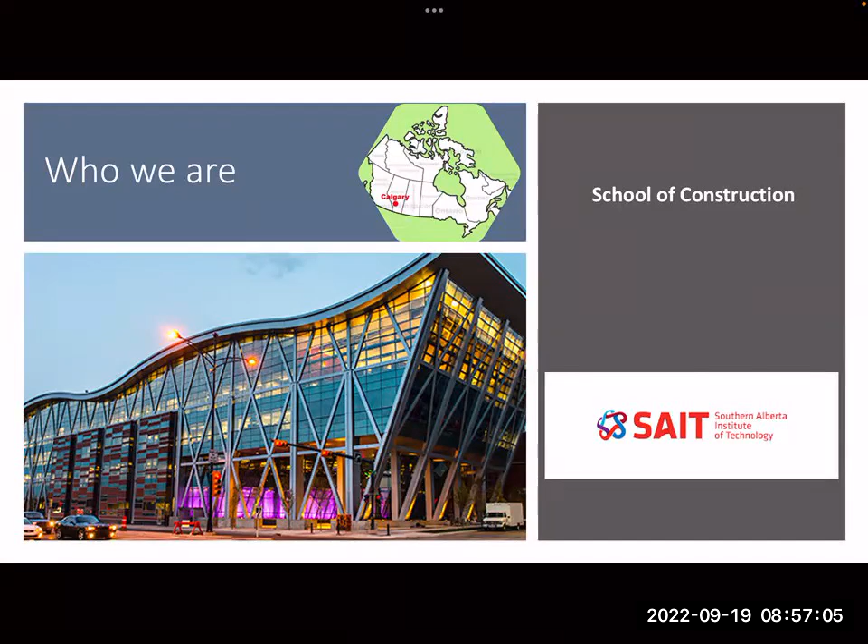Again, my name is Azzeddine Oudjehane, and my involvement has been in sustainability for the past 20 or so years. I've been involved with board director advisory for the Canadian Green Building Council in the Alberta chapter, and work with government, with industry, around the same objectives of bringing sustainability to construction and in general to our life. I'm passionate about that, and being involved in research and development as well as curriculum and partnership.

I'd like to acknowledge part of this, and I'm currently in Switzerland after visiting some of our partners in Europe. Again, same goals and objectives globally around sustainability, using different alternatives like what you've heard. I believe an approach to mass timber, global towards climate change, by Patrick Kraft from Bird Construction. This is kind of the same path.

I'll emphasize at the end one proposal, or one suggestion, or a proposition on how to bring the built environment towards that. But before that, we'll tackle some of the key questions. Why are we here? And what are the trends? What are we doing to face the challenges? Because we are here primarily because we have a carbon emissions challenge.

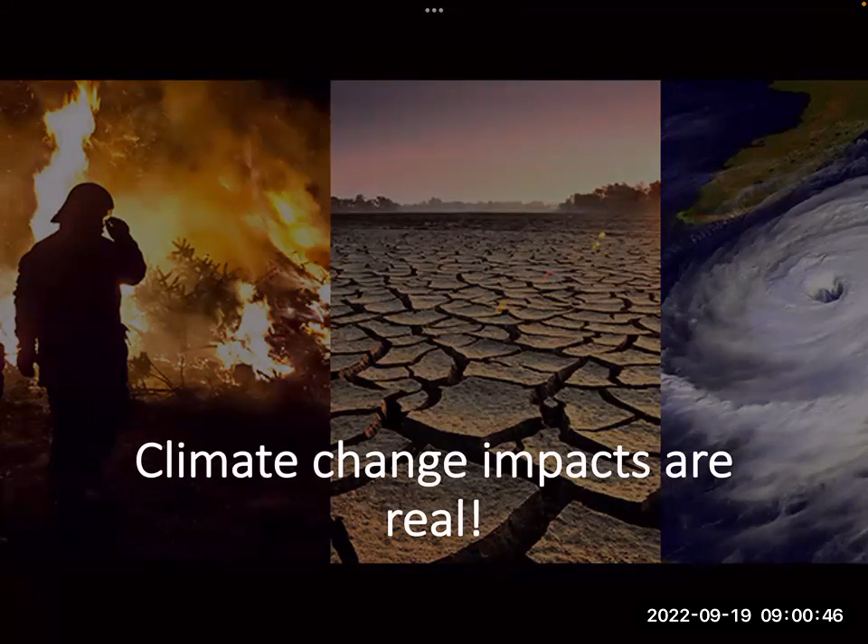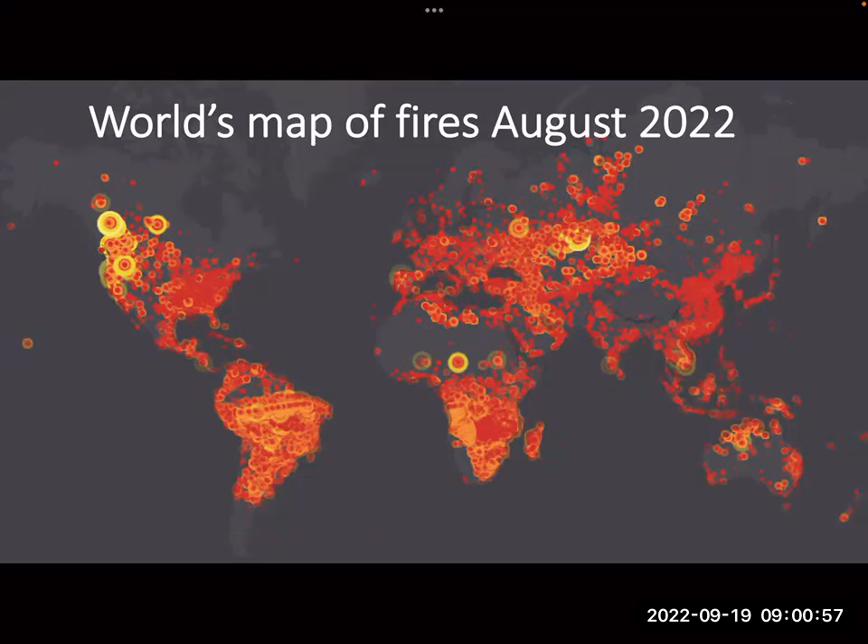This is an image, a satellite picture from a Canadian site showing the fires as of August 2022, about a few weeks ago, I guess. Same picture, using a NASA satellite image, and you can see the hotspots, the red hotspots for fires across the globe. Well, luckily the desert is yellow, but there's no vegetation there to go on fire.

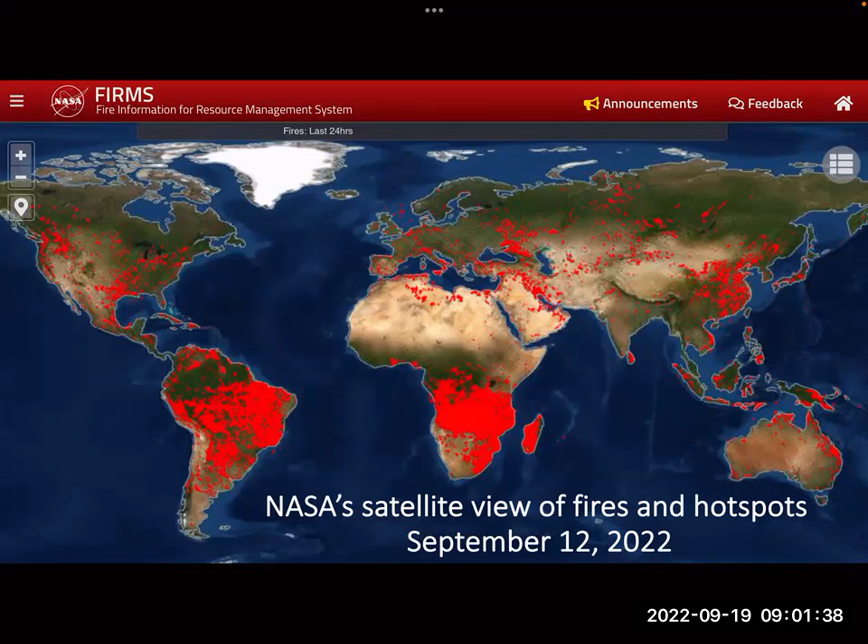What I find interesting is the fires in the southern hemisphere, where it's not even summertime. So we have a lot of hotspots now in the western side of North America, California in particular, and some even in Western Canada and British Columbia a few weeks ago, that have had an impact.

How can we accelerate decarbonization? Worldwide—not just in Canada, Europe, or North America—globally.

It has to be a common objective that we pursue to stay below the 2 degrees Celsius increase of temperature, and hopefully achieve 2050 neutrality, if not negative. How do we do that? We know the ways. We need to reduce the use of fossil fuel, and we need to do business differently.

The challenge is getting to 30% reduction of carbon by 2030, and carbon neutral by 2050. We've been talking about it for years, for decades, and every time we keep pushing the goal. So let's dive into why we talk about the built environment.

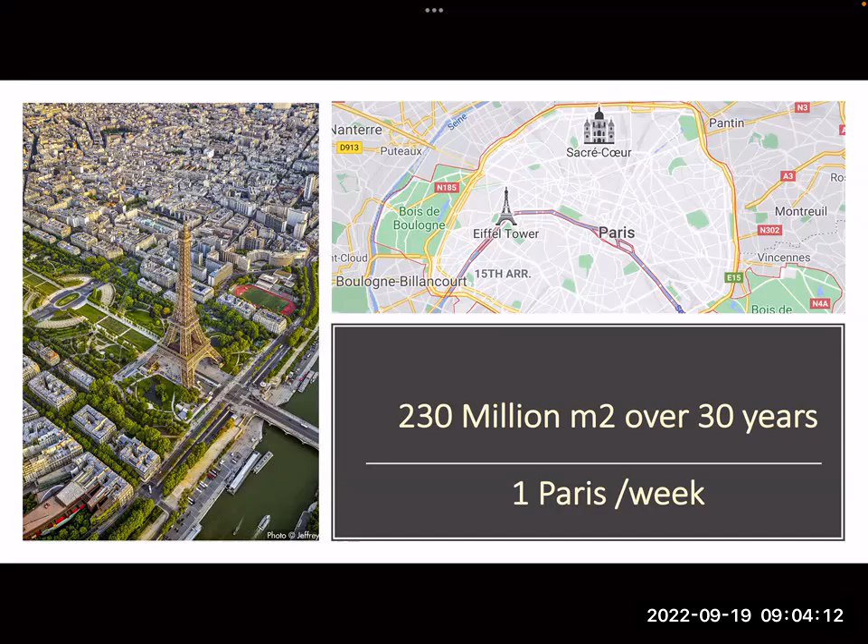That's why we need to be conscientious. And why the built environment? Overall, 39% of global greenhouse gases result from the built environment - 28% from operation and maintenance, in other words heating, cooling, lighting.

The other 11% is embodied carbon, which comes from the material, from cradle to gate - from extraction of materials, processing of materials, to delivery of the project including construction. So that's 11%. Any percentage of carbon we take off is a valuable input.

Going to carbon footprint - in my educator role, I always like to bring everybody to the same level. So what I'm talking about in terms of carbon footprint is what individually we do on a daily basis: going to work, buying groceries, traveling, and so on. It's typically measured in tons of carbon equivalent, metric tons.

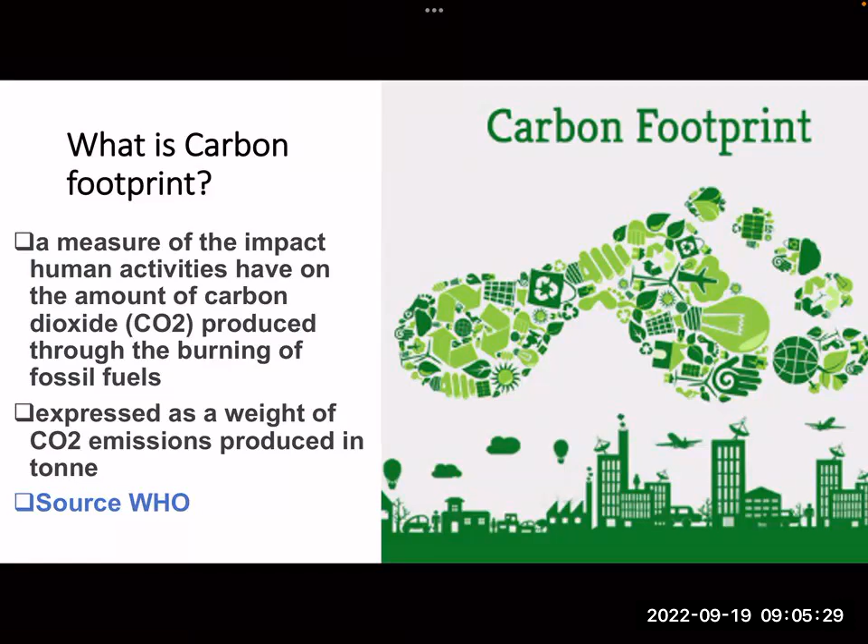That's where we have an individual role. We all have a carbon footprint - you can see the image here. How can we reduce that? My travel to Europe this time is equivalent to 3 tons of CO2 equivalent.

That's a lot. So I am aware of it and try to remain cognizant of my impact, because 3 tons of CO2 equivalent is more than the carbon footprint our household has - approximately 2.5 tons for heating and cooling over a full year. So that's less than my footprint just from traveling to Europe this time.

By being conscientious of the carbon footprint I have when I travel, I have to find alternatives. That's our common goal - how can we all achieve that? Continue our practices, continue to travel or do other activities while reducing our carbon footprint, or at least maintaining it at a level that's not going to affect the planet.

As a proponent of training, this is how I see the first step, or the first barrier: creating awareness. We need to train students, our communities, bring awareness about carbon footprint. Individually, if we all walk the walk, we'll get to net zero. So that's my first path to net zero - giving awareness or creating awareness about carbon footprint and how to reduce it, or finding alternatives.

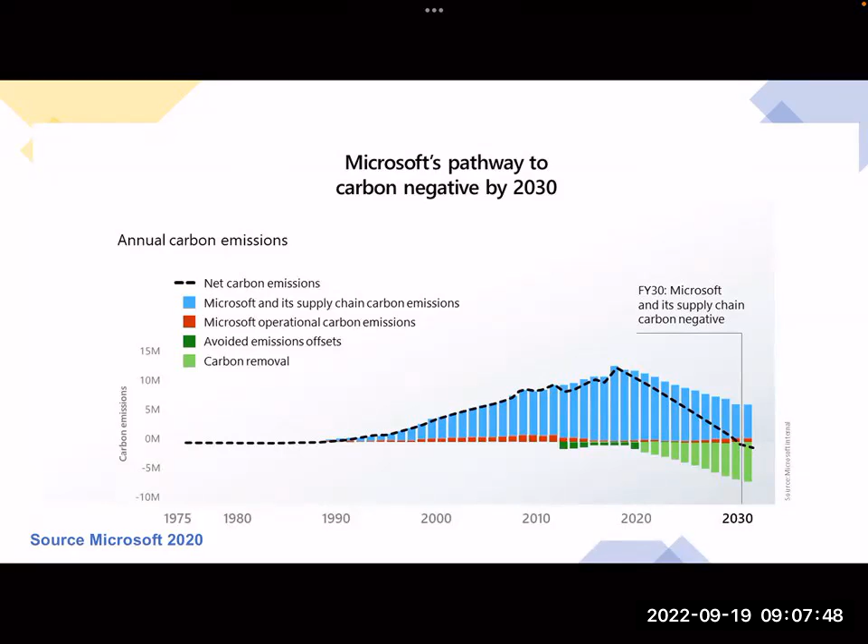So what are the trends? Globally, I'll use some examples of large corporations. Microsoft is hoping to achieve net carbon negative by 2030, and by 2050 offsetting all the emissions put into the atmosphere since the mid-70s. How do they do that? By going renewable, building better, having buildings that are healthy, with no carbon emissions during construction and no carbon emissions during operation.

That's a goal. Google made a statement years ago that they have actually been carbon neutral for the past 10 years. How did they achieve that? By using renewable resources, no fossil fuels. So as long as they maintain activities below a certain level, they can achieve that. Our buildings need to be healthy.

Walmart - and you can see I used a spectrum of businesses from different sectors - Walmart goods and services committed to 2040. The reason I'm using Walmart is they have a path, and it's tied into how they're driving the business, tied to construction and using and building better.

Amazon committed to buying 100,000 vehicles. They're not changing the core of their business. Amazon delivery, they're committing to one day or same day delivery, but they want to reduce the carbon footprint. And then again, it's your conscience about, do you buy from Amazon when they have a delivery? So if you are part of that spectrum, do you go to the store? Do you walk to the store? Do you drive to the store? Do you order Amazon? And those are personal choices, but they are part of our carbon footprint.

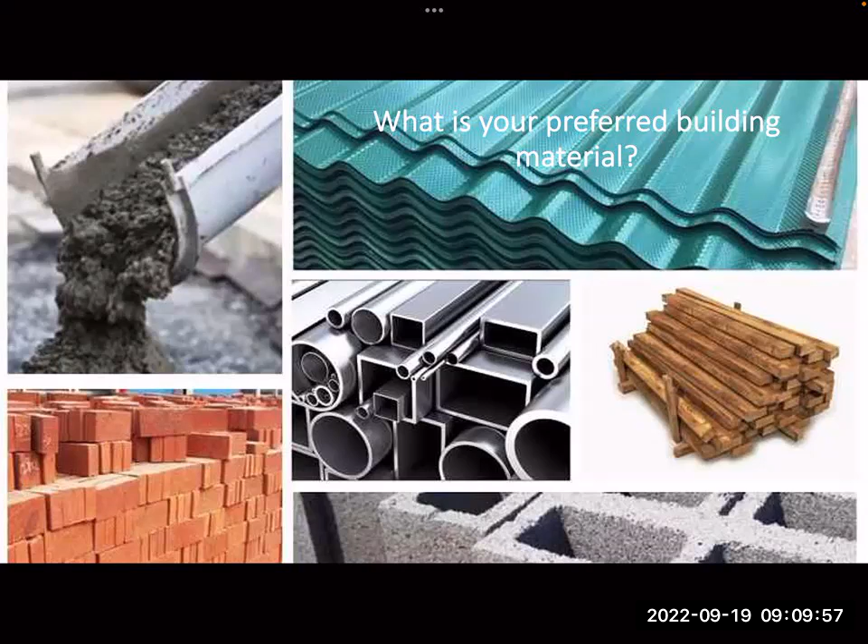So can the built environment achieve net zero and carbon zero to some extent? That brings me to my second poll question. I want you to reflect and give me your opinion on your favorite or preferred building material, construction material, based on your country of operation and your personal preference. So what is your preferred building material? And I'm only giving you three options: concrete, steel, or wood. Three main general building materials, depending on where you are. If you have a preference for brick or masonry, related to concrete, that's close enough. Okay, how are we going to do that?

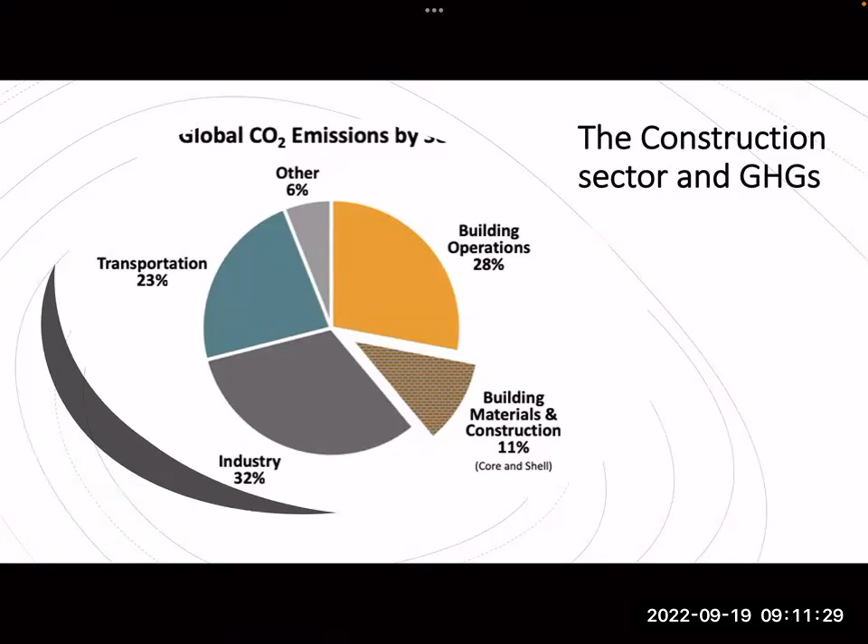I know European legislations now are putting stringent standards that in a year or two - I know talking with colleagues in France as well as in Denmark, what they are building now to current standards, they won't be able to build in 2 or 3 years with new standards of carbon neutrality.

If you have chosen concrete as part of your preferred material, you're aware that concrete uses sand, and by 2030 or so, there'll be a shortage of sand to use in concrete manufacturing. Because sand is actually the third natural resource extracted out of the planet after air and water. Well, that's a fact. So bearing in mind that, the other stat or fact that I want to relate came from a report from the UN in 2017 and 2018.

The concrete industry produces or emits 8% of the overall GHGs globally. Compare that to the airline industry - stats from the airline industry, I went to check, these were about 2.5% as of 2020. Granted, it was post-COVID, so with little airline activity, but overall, the airline industry emits about 2.5%, all sectors included. Shipment industry, 5%. So these are interesting numbers. And all these sectors are working towards the path.

Talk to innovators. I'm not involved in the airline industry, but I've heard or read a few days ago that Air Canada, one of our largest carriers in Canada, has agreed to purchase 10 or 20 hybrid aircraft, using electrical power and probably biofuels, but that's the commitment. Again, we don't want to disrupt the businesses. We just want to find alternatives of doing business cleaner, in a better way.

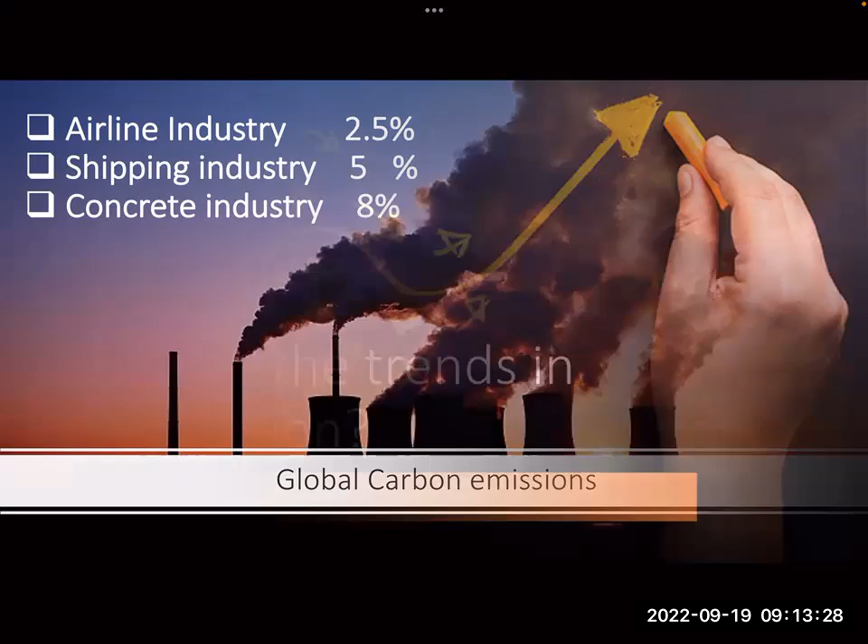And that's what we want for the construction industry. Slow steps, but the trends are there. You heard from Bird Construction. In this presentation, I'm using another example, Chandos, with a net zero by 2040 commitment. The construction sector, when you have leaders like Bird, like Chandos, they also drive their suppliers, their subtrades. I know for Chandos that they committed to net zero by 2040. They will no longer contract or purchase materials from suppliers who, for example, are not committed or don't give their full carbon transparent data.

And so that's, again, leadership and big drivers that will bring us to changing the way we do business on a daily basis. Walmart - I use specifically Walmart, though others could serve similarly - has recently committed to building a large campus in southern United States, the campus for headquarters and training. It's committed to being carbon neutral, using different ways of building, like mass timber construction. And so that's the trend we see, building better as we maintain our core businesses. And so, you heard it from Patrick, I'll continue the trend. Wood is trending because it's a green material.

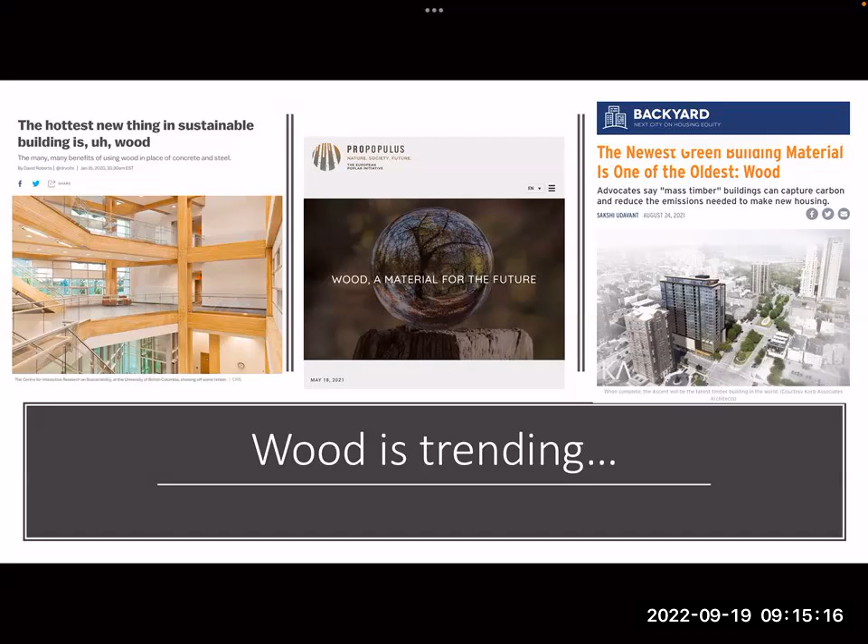You read sometimes that wood is the building material of the future. For those of you who've chosen wood, hopefully that's a confirmation of your choice. This goes about trends, and from Canada to the United States, 400 projects just in the past 3-4 years out of mass timber, slightly different from traditional.

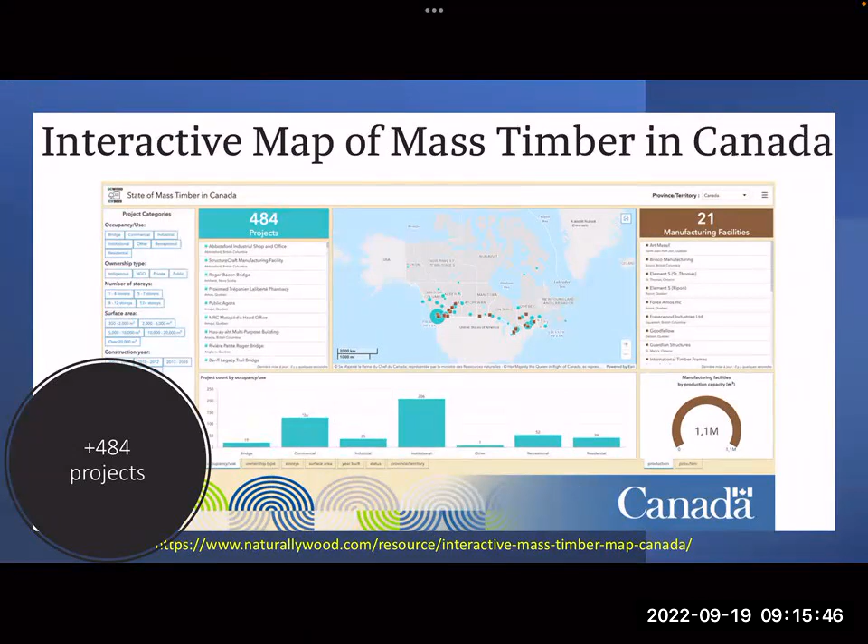Canada is a country where we use wood in most residential construction. We want to expand that to all types of construction: commercial, industrial, institutional, and so on. So we need to continue doing that.

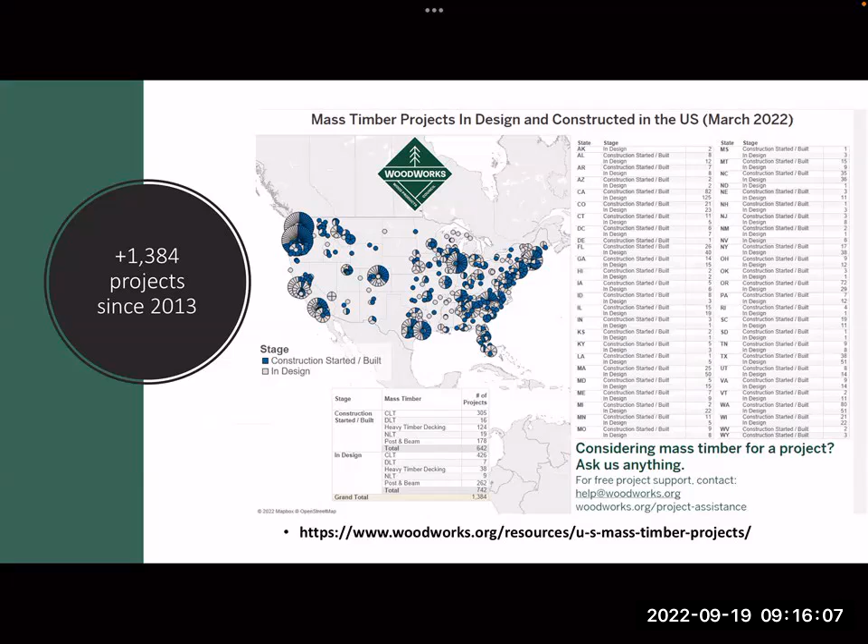The growth in the United States is much, much bigger. It has actually seen a drastic increase in the past 2-3 years, with 1,300 projects completed, or in construction, or in design phase, just in the past 2-3 years. You can see, pre-COVID and following COVID.

So that's accompanied with the race to build taller with wood. Again, there is a driver for that. One is showcasing that we can build differently with wood, but it's also demonstrating the feasibility and sustainability of wood, making the case for sustainable construction using wood.

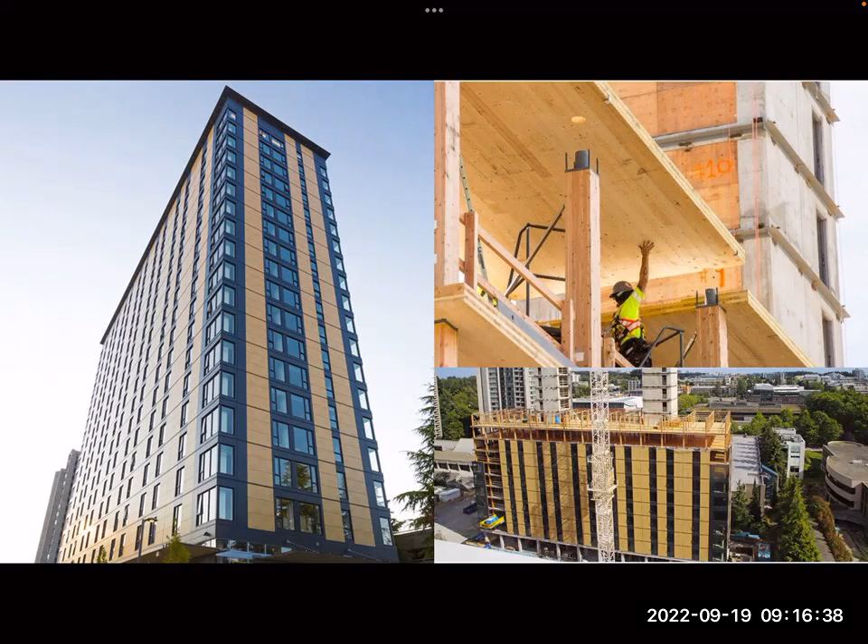Going back home with Brock Commons, tall UBC tall building, 18-story, finished in 2018, and demonstrated the use of new innovative approaches - glulam, CLT, a different way of building, fast, but also with that carbon impact in mind. That's kind of the objective.

Continuing my travel globally, the HoHo building in Vienna - again, mass timber primarily - and it creates a healthy environment. During COVID, typically we live indoors for about 90% of our daily life, at least those are the stats for Canada and North America. So our indoor environment has to be healthy.

Continuing just on the tour here, showing you buildings - I'm sure you've seen others in previous presentations. This one is the tallest building now out of mass timber wood primarily construction. You can see it's a glass curtain wall. Building with wood doesn't mean eliminating concrete or steel or glass.

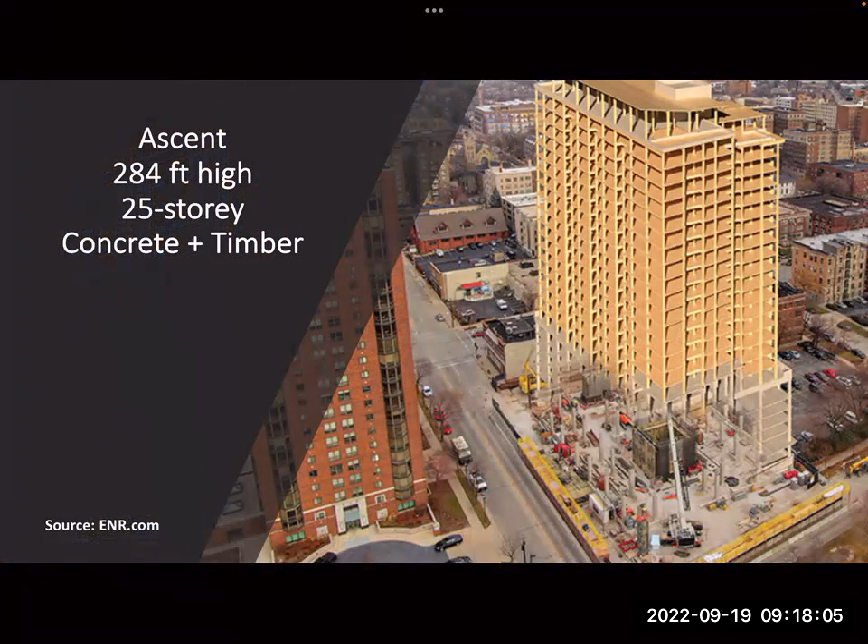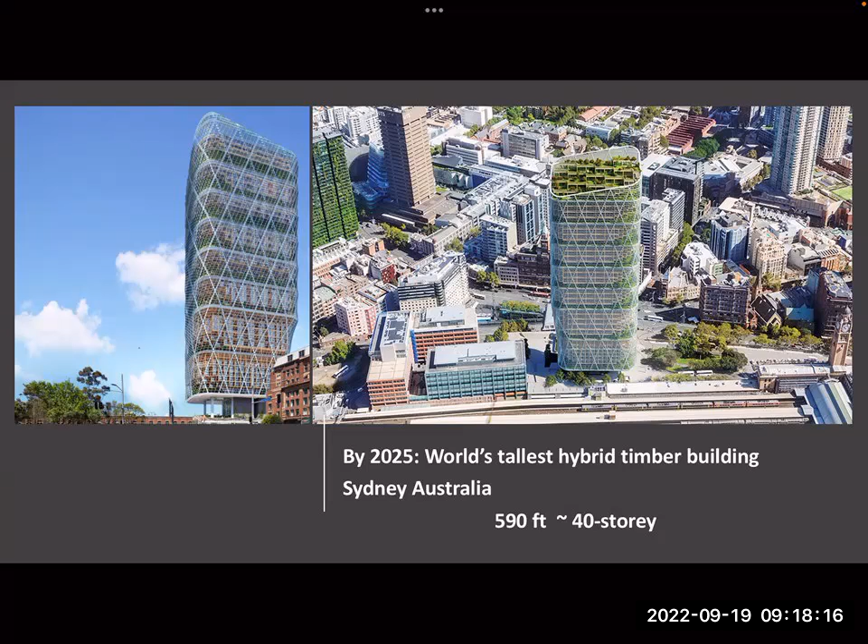It's just finding the compromise, and I'll show you the compromise we'll achieve from our proposed approach. As you can see, concrete for 4 floors, and then the rest is all out of wood. This was completed a few months ago, I guess, now open. This is a concept project out of Australia, showing the global approach to building differently, building better for a community environment.

So to summarize it, why build with wood, taller or small buildings or mid-rise? When I talk to my counterparts across Europe, they say, well, we don't like to build taller, and that's fine, but they're driven by sustainability, and wood tends to be the common denominator that drives us to sustainability, to life cycle impact, and other aspects. So we like to be optimum in our building and the businesses.

So the last few slides, I'm just trying to follow up on how do we make the case for sustainability with wood. Like I said, during COVID, we were stuck indoors for all 100% of our time. So we need to build something that is healthy, and wood is the ideal material for that.

Just again, to go back to definitions for understanding carbon - earlier I talked about the 11% and the 28%. The embodied carbon is what we consider to be from the cradle, so from when we extract material to the delivery of the project. As you can see in the schematic, it's the material, the manufacturing, the construction - building is finished. Now, building is delivered and turns into operation and maintenance carbon, how we heat, how we cool.

And then, of course, with climate change, we're exposed to extreme weather changes. So our buildings have to understand how to be adaptive to that challenge, or adaptation to climate change. But that's in the operation and maintenance.

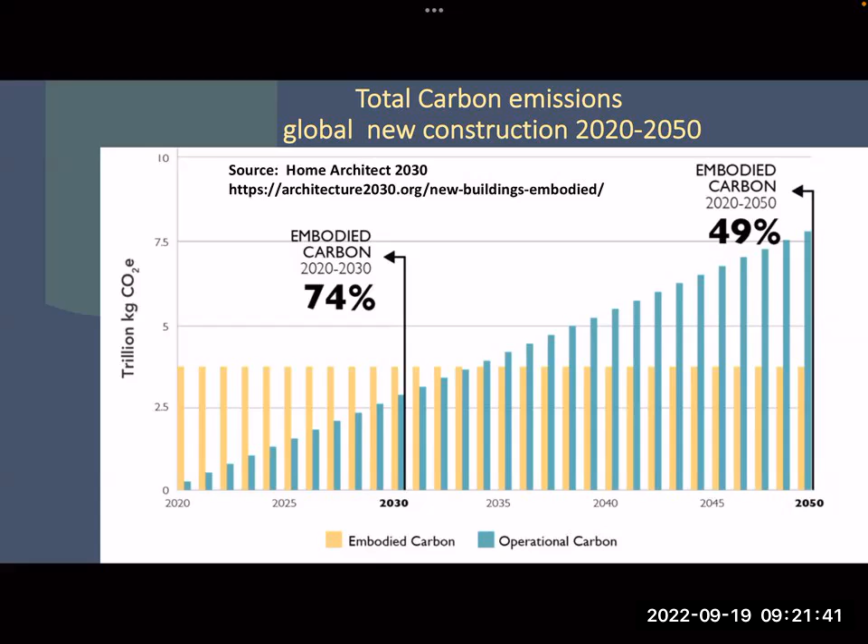So based on this example, I'll make suggestions. If we maintain it, you can see by 2050, the embodied carbon is 50%, or 49%, of the total GHG from the built environment. So if we reduce that, we'll have done a great job, and I'll show you our approach to that.

Just briefly here to showcase an overview of the carbon impact of different materials, from the worst, aluminum, to more or less the good students with lower impact. This is GHG per kilo of material.

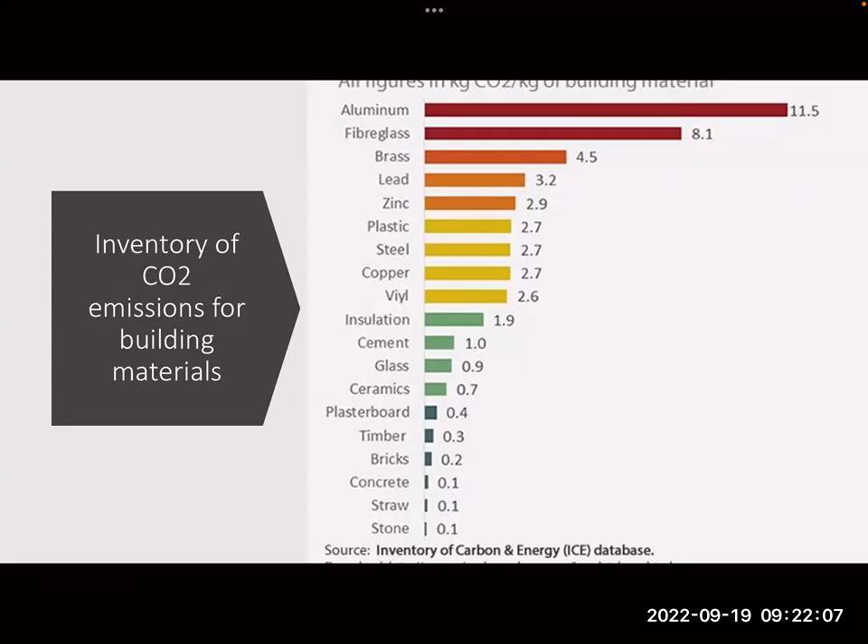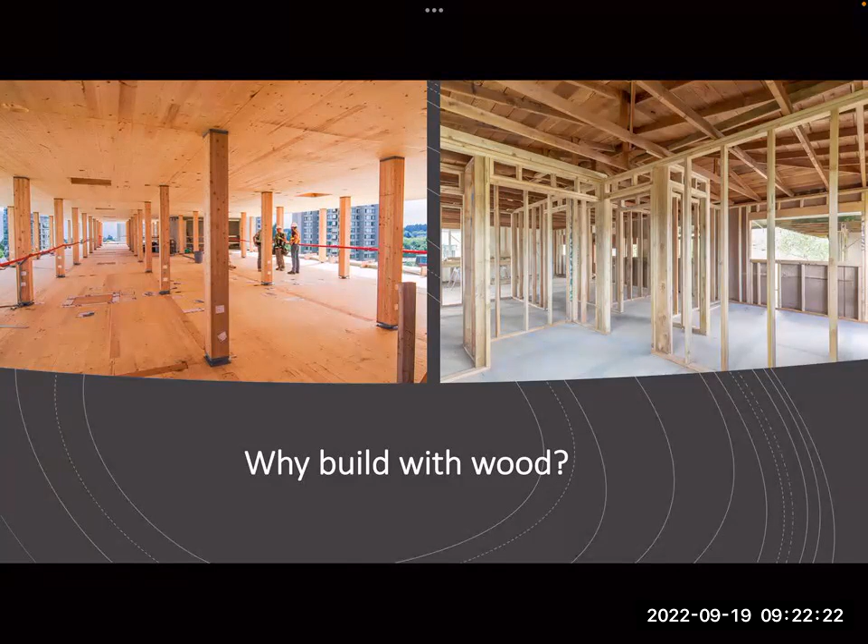So why build with wood? Hopefully the previous presentation made the case, but I'll hammer it again and emphasize it one more time with our approach, mass timber and light frame. Why build with wood? Because wood is a carbon sink.

Each cubic meter of forest tree means one ton of carbon CO2 sequestered. Wood is a carbon sink. So using that same equation comparing systems, if we build with light frame versus mass timber CLT, here's how they compare. They are actually negative.

The net carbon emissions are negative for wood systems. Compare that to steel or concrete, with virgin steel being the worst in this case, because it's not recycled steel.

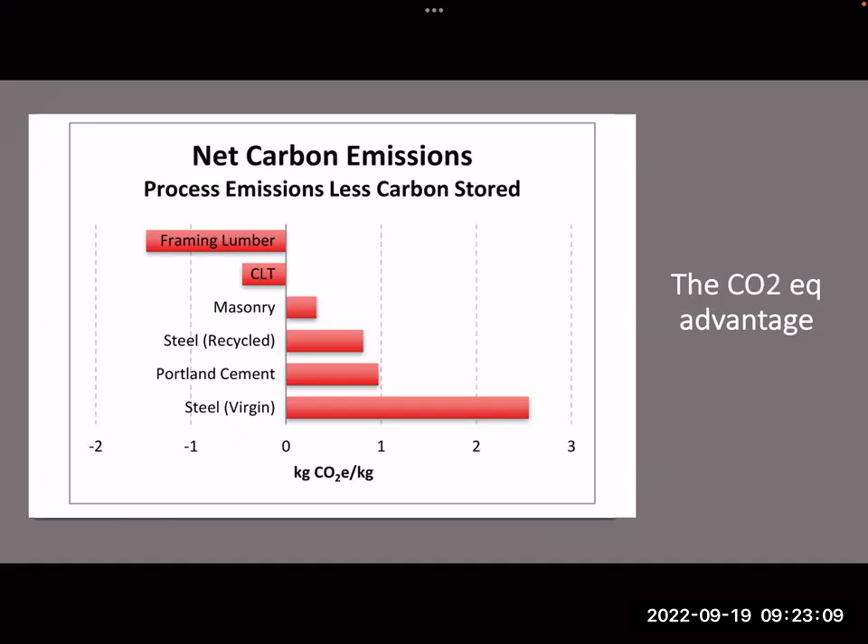So what is the path? How can we get to net zero or carbon zero for the built environment? Suggested awareness - earlier I showed you the chart showcasing the carbon emissions between now and 2050, 2060, if we continue in the same trend of construction. These are assumptions and simulation.

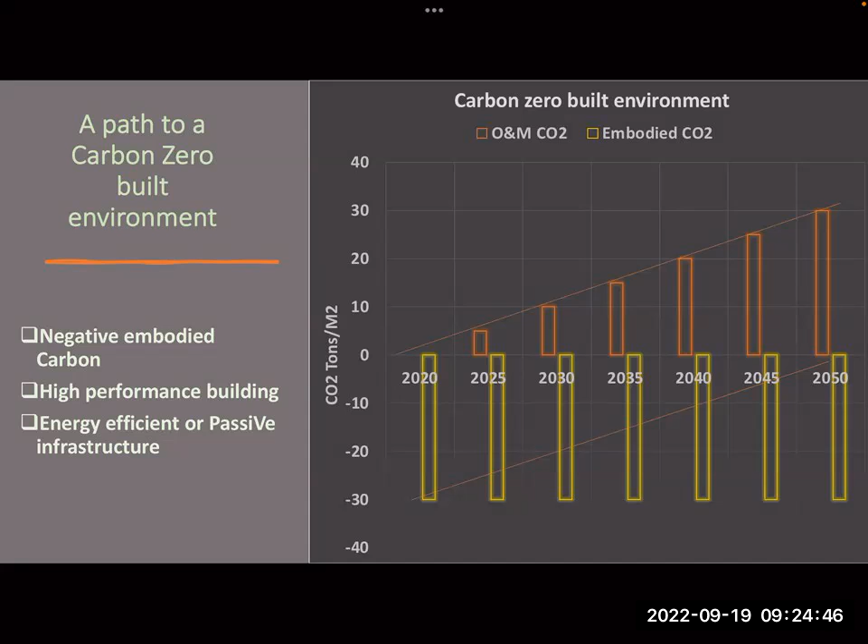Of course this is simulation, but if we start building with that in mind, we can certainly do it. The main goal is to achieve carbon negative at the start, from cradle to gate. If carbon emissions are zero or negative, we can certainly do better towards 2050.

We did some work at SAIT with students looking at making the business and sustainable case for people to invest and build. We did a 10-story building comparing traditional concrete construction versus CLT. A 10-story building for Calgary would be equivalent to roughly 390 trees out of a sustainable, managed forest.

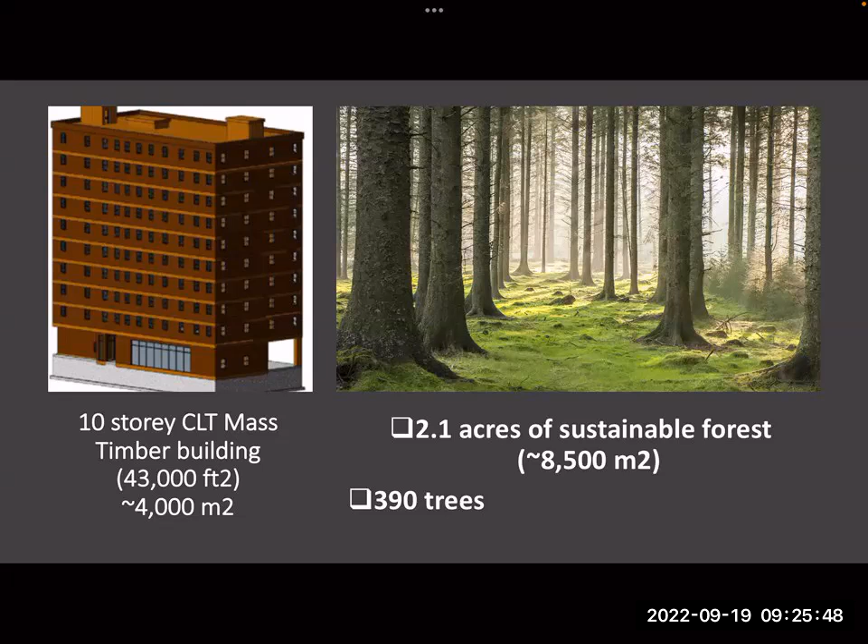I'm always asked in my talks, how about the rest of the world? In the Southern Hemisphere, where there are no trees, like Sub-Saharan Africa, we can still share innovation using the same approach, using local materials that we know how to build better with.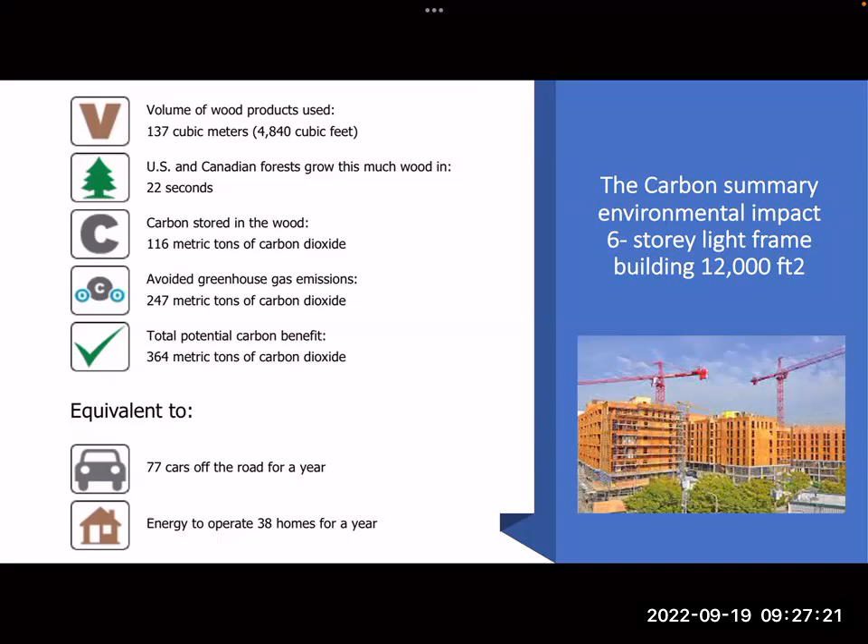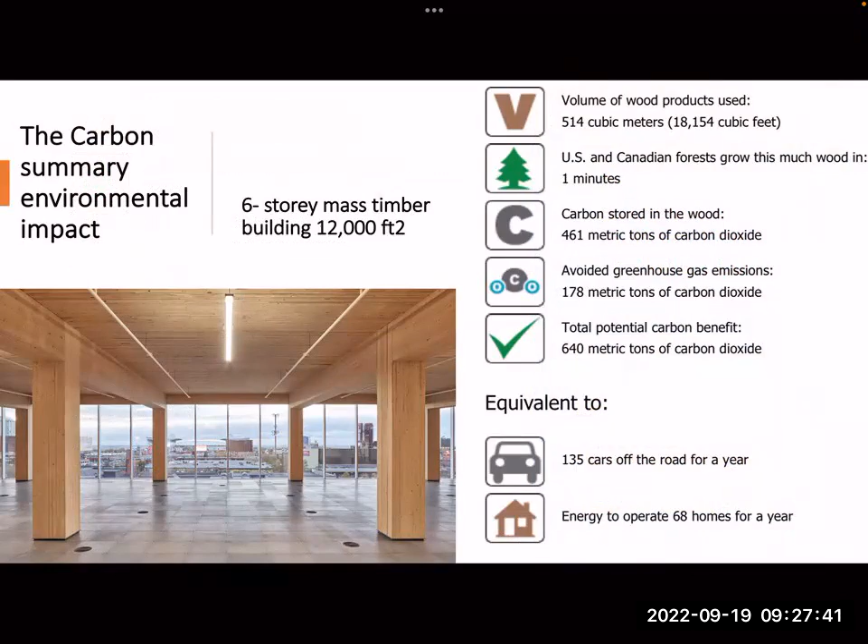Using the mass timber approach for the same building, same square footage, we got nearly 135 cars - twice as many - because we use massive wood in this case. So this is the approach: if we can measure carbon for each building, each new project, then we can look at alternatives.

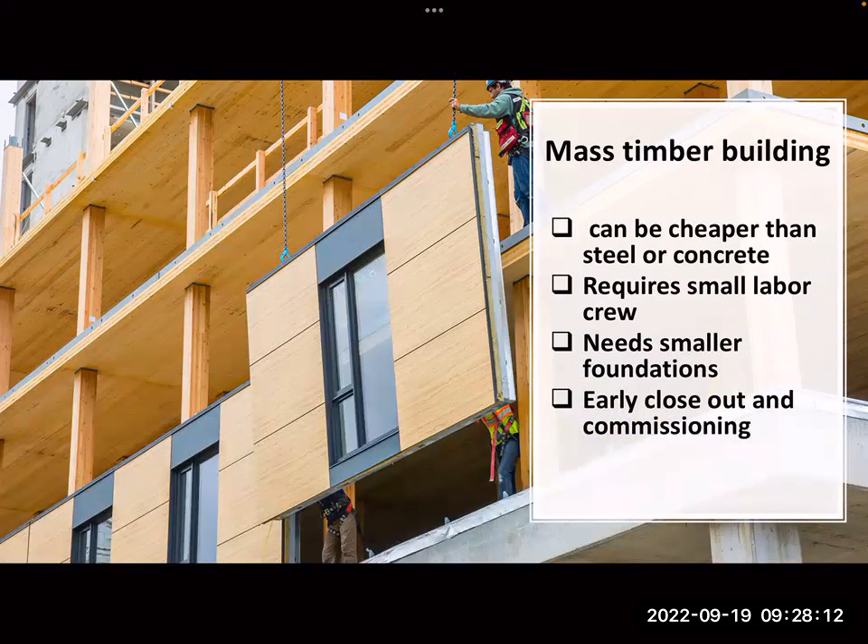This brings me towards the end of my talk. Can the built environment achieve carbon zero by 2050? Yes, that's my belief, and that's an approach we'll continue using mass timber. It has other benefits you've probably heard of, but substantially, it's the carbon footprint.